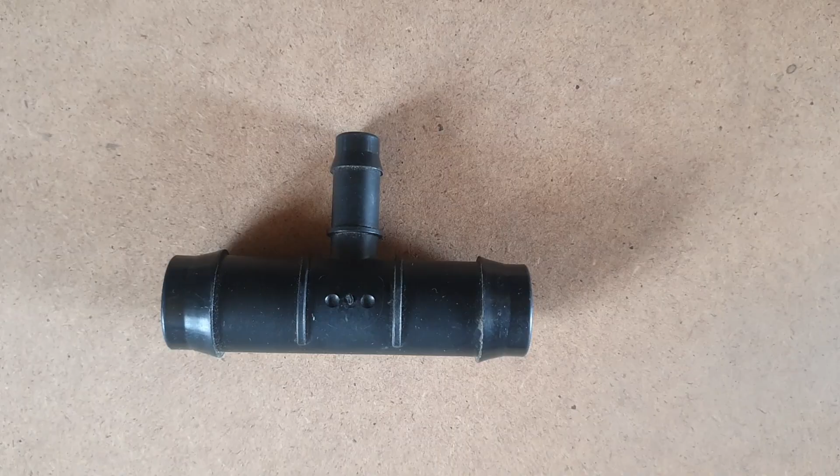I'm creating an irrigation system to irrigate plants in the fern patch when we go away on holiday, but I'm short an irrigation fitting. In this video I'll create one using Fusion 360 and a 3D printer. I need a 19mm to 13mm irrigation adapter, but I only have a 24 to 13mm one. I live about 40 minutes round trip from the hardware store, so to save time I'll just print one, using ASA filament for its UV protection and strength. It should work, or at least get me out of trouble for a time.

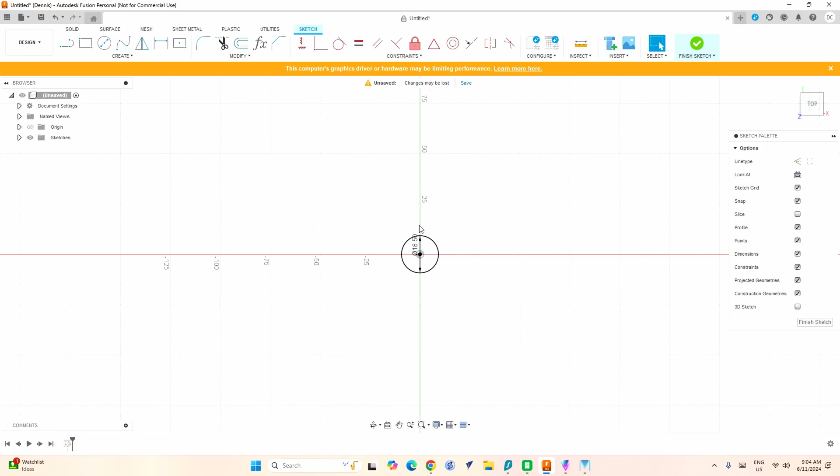As ever in Fusion 360, we start with a sketch on the base plane and draw a circle, specifying the diameter at 18.5. Then we extrude up to the component length of 80, draw an offset plane, take it down to -5 for the start of the barb on the irrigation fitting, and draw a circle.

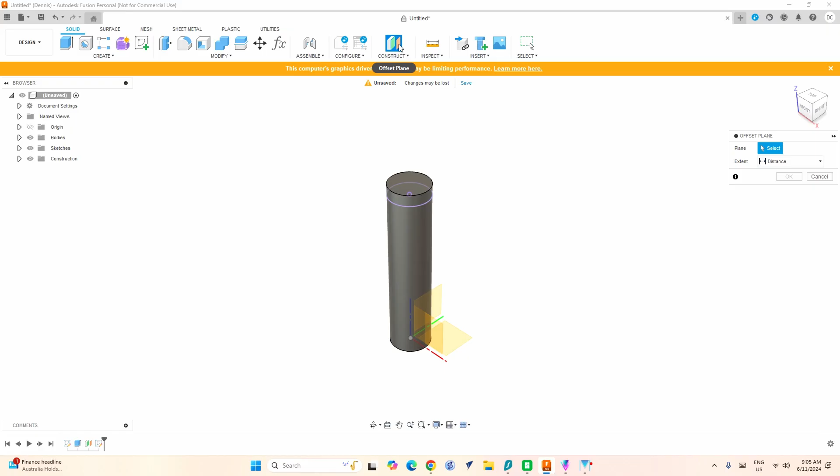I press the P key to project the diameter of the body to the sketch, then create another offset plane, bring it down another 5, so -10 total, and draw a sketch there. This is the wide part of the barb.

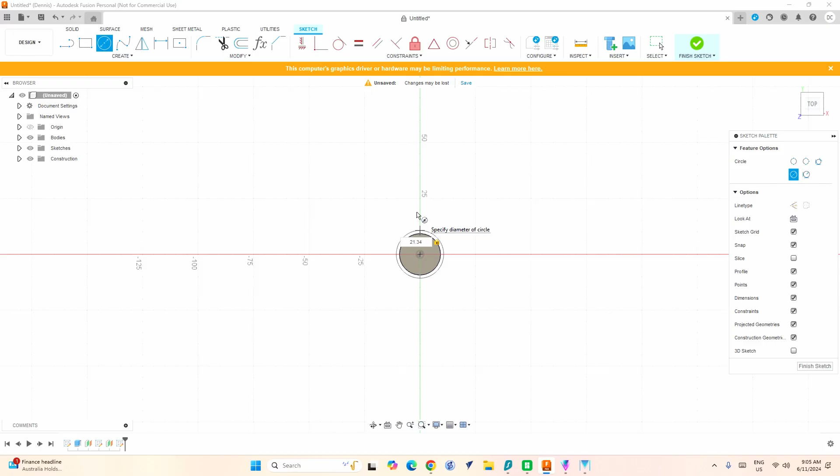How big is that going to be? 21 millimeters. Now we can draw a loft, in solid, from the small circle to the large circle, and that creates our barb for us.

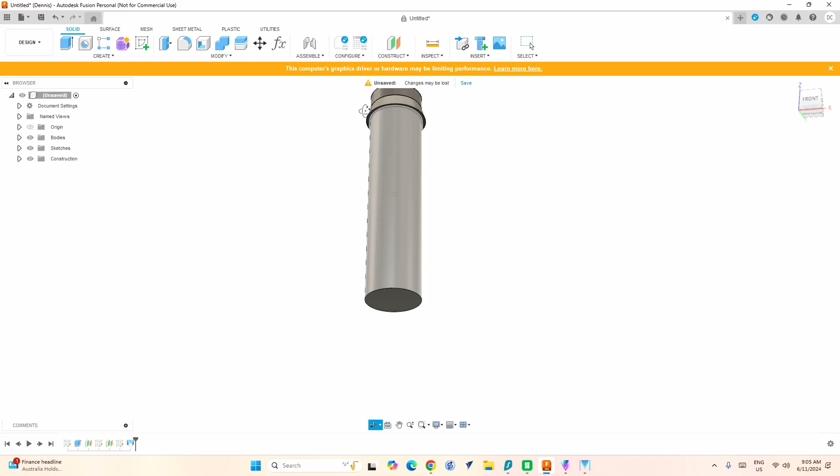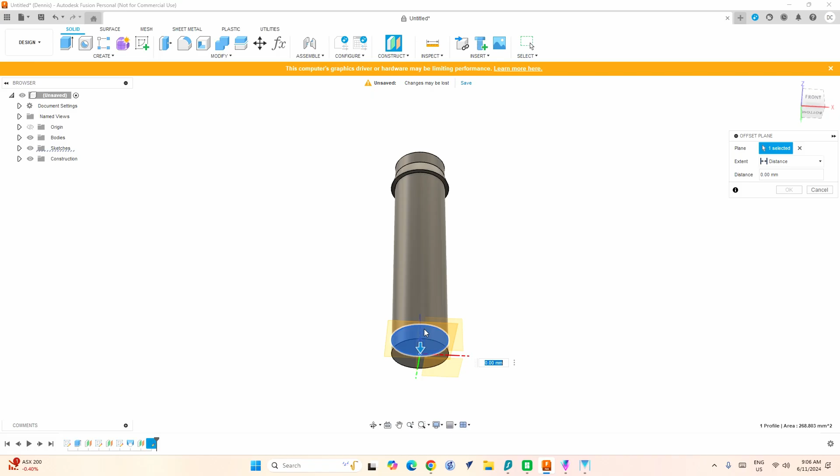But we've got to join it, not cut it. Now we do the same on the other end, drawing a sketch here, but we can project the large part of the previous barb to this drawing using the P key, then create another loft, and again join it.

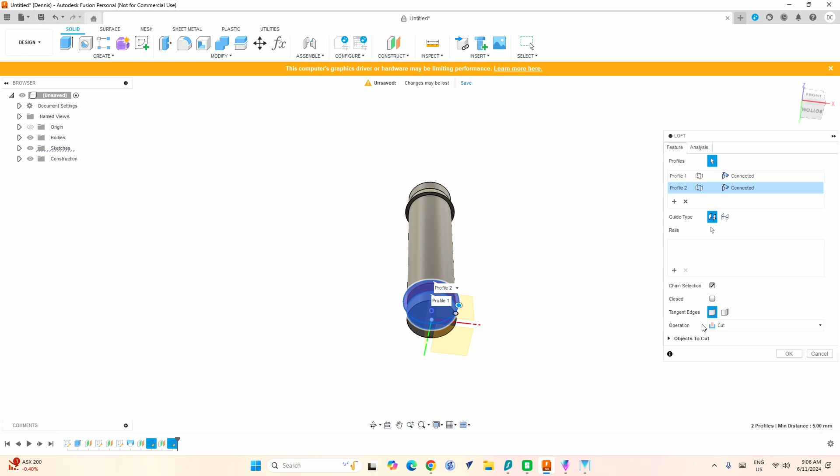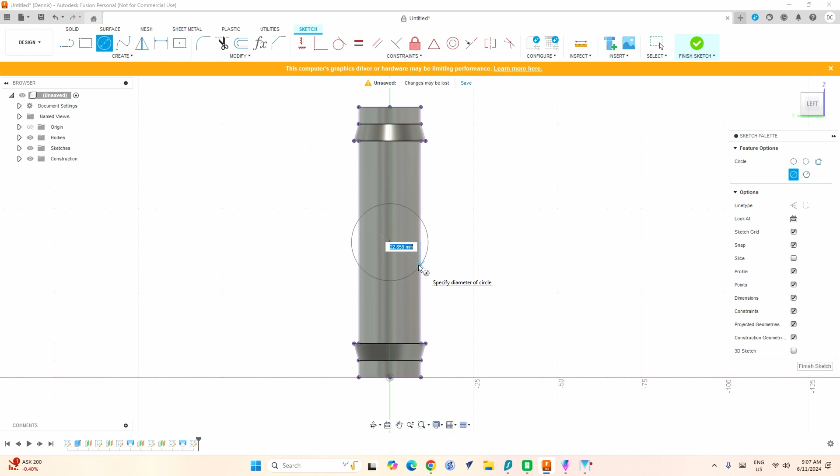Now we've got to create our T-piece, so that's smaller. I'll draw a sketch on the center plane and project the body onto the drawing. That's got to be 12.8, I'll go for that. Now hide the body because you can't get to the circle, click up on that, and turn the body back on.

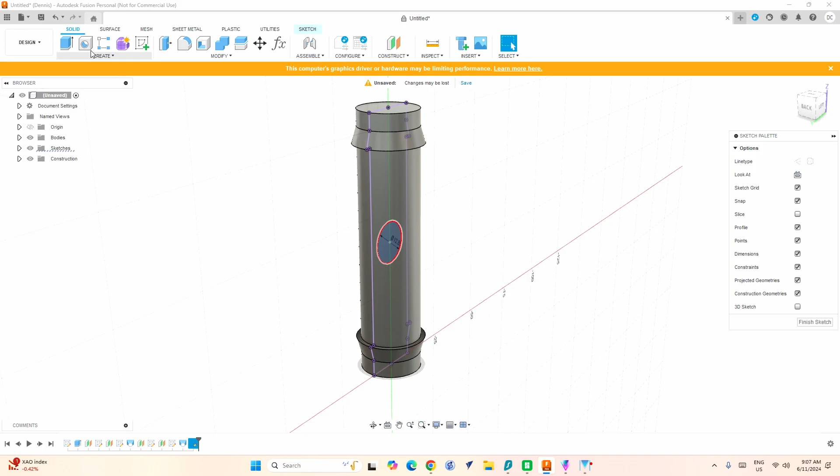We select join, making a bit of a mess of it there. Okay, now we've got our T-piece, so we've got to put a barb on the end of that one. That's just the same as doing it before, but obviously a smaller size.

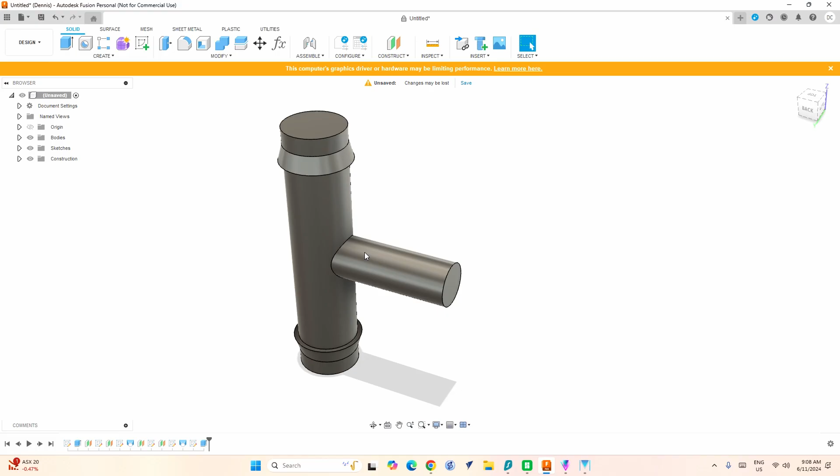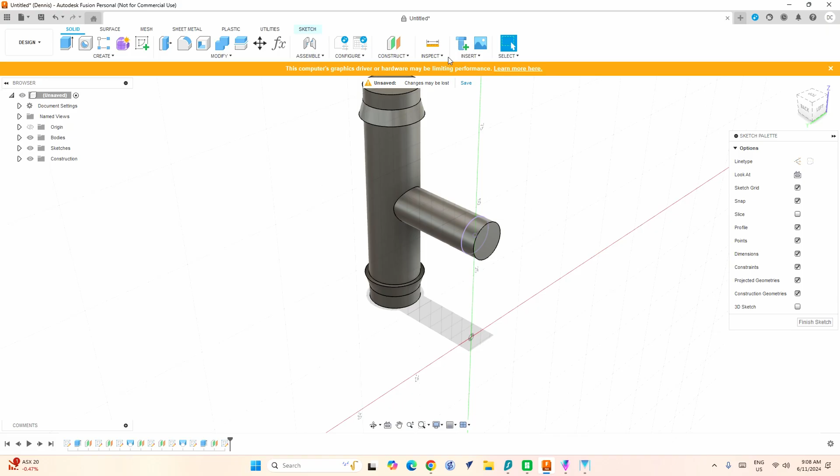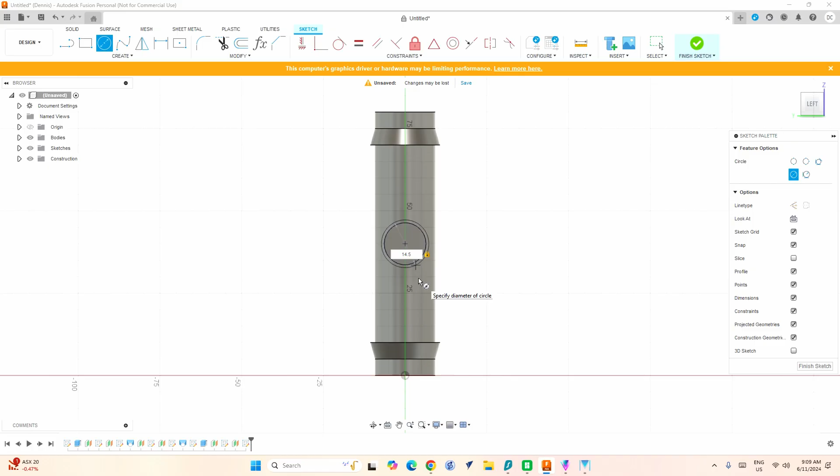Surface plane, -5, drawing on it, and project the diameter. Change it back, that's the right one. Another surface plane, -5, another drawing, 14.5 this time, I think we'll go for. And the last loft between those two circles gives us our barb, and join it, not cut it.

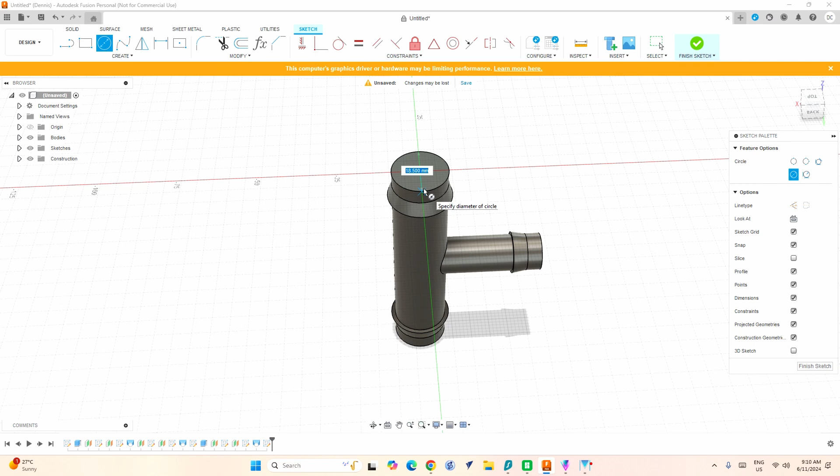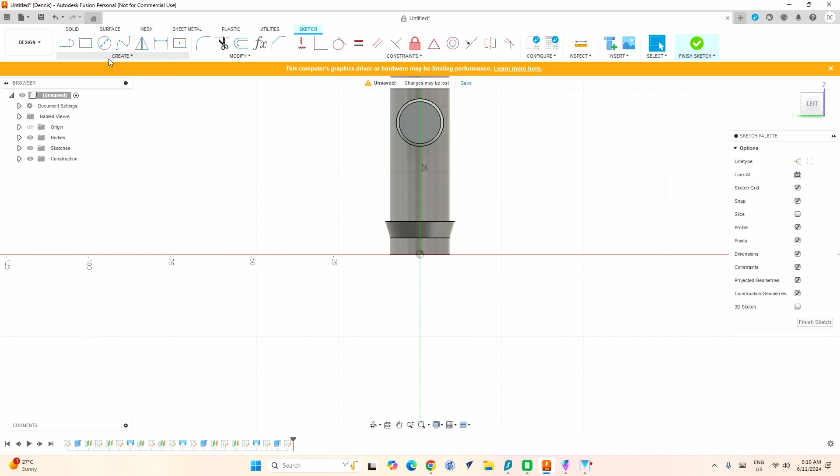Okay, so we've got the outer part of the fitting, now we've got to draw the inner part. Having created that circle, just extrude it all the way through the middle. Draw another sketch on the end of the tube, it's going to be 8.5, and extrude it through to the center.

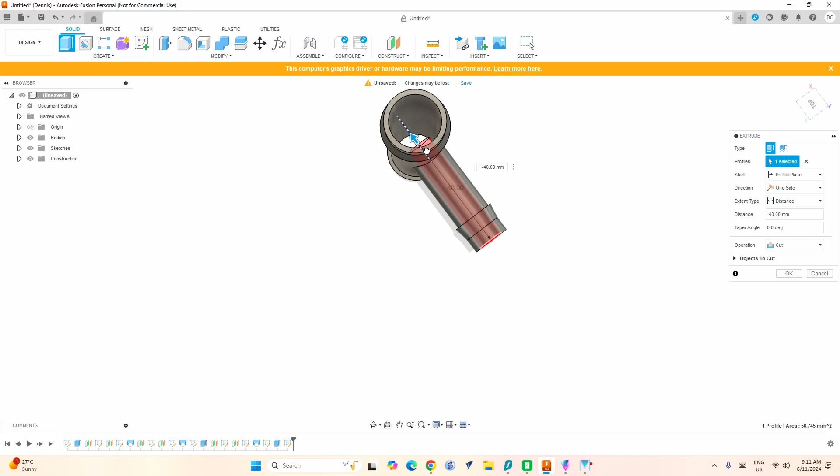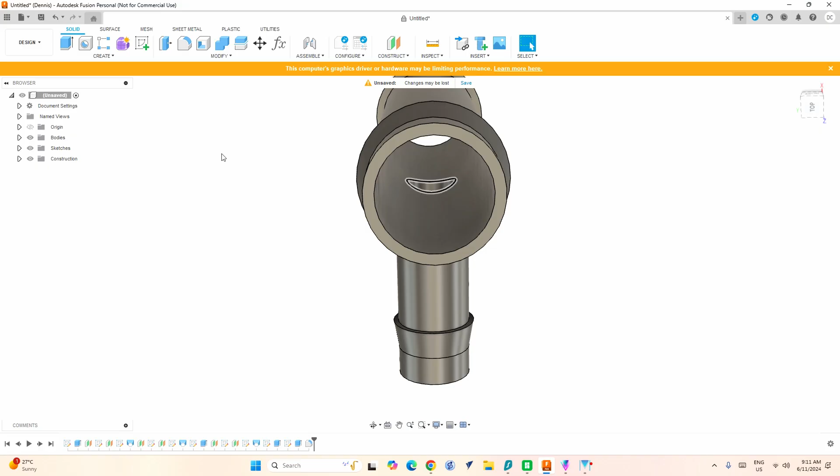Now the weak part of the component is going to be the join between the T-piece, so I'll put a fillet in there if I can. Make that 5, just for the heck of it. Then we can do it on the inside too, because while that might be hard to do on an extruded piece, on a 3D part we can do that. And that's it.

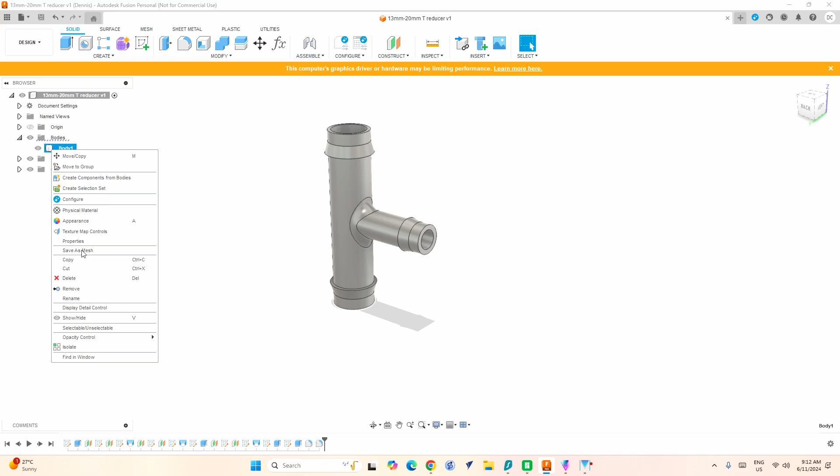Just save it, and now we can export the part as a mesh so we can import it into the 3D printer slicer. I'm using Bambu Lab, or Bambu Studio I think it's actually called, to do my slicing.

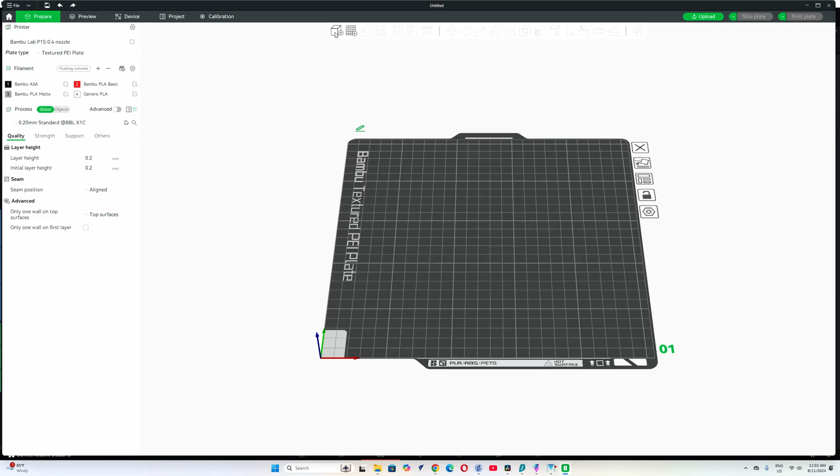Okay, that's it. So in Bambu Studio we find out where we hid our STL file, and that is that one, I believe. Yep, there we go.

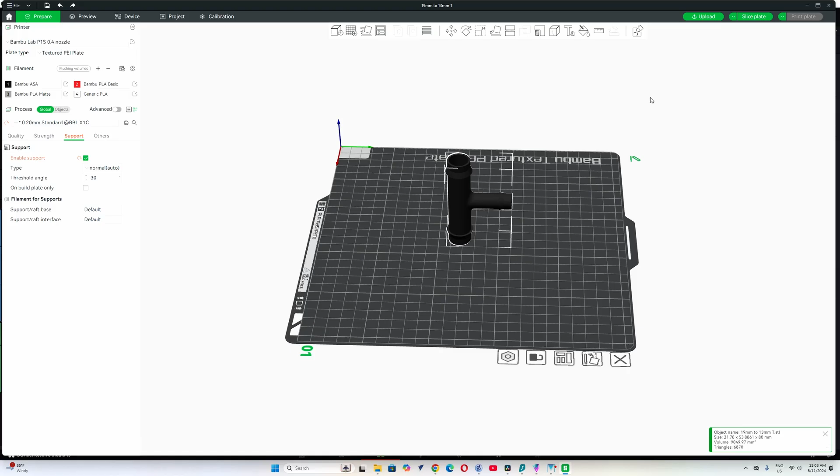We'll select support, turn support on, and select my filament, that's filament 1, which is Bambu ASA, and that's it. It has to be done in that orientation, well, it's better to do it in that orientation. We slice it, and it adds all of those supports, and we're looking at an hour 22 print time.

Might have been quicker to drive to the hardware, but anyway, this will do it. I can be doing other things while I'm waiting for it to print. And then we print the plate.